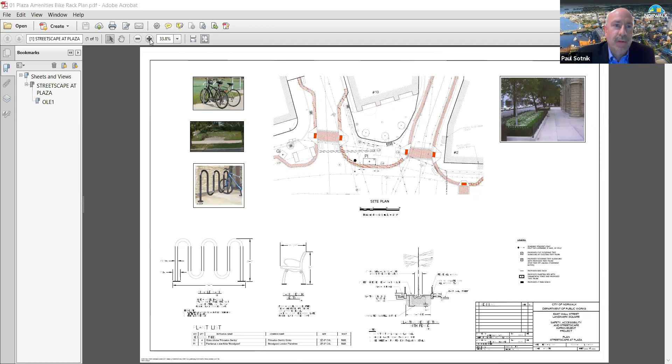For a minute right now I'm going to blow up the middle of the map so you can see some of the information of what we're talking about, and a little later I'll expand it even more. This area is the plaza in front of the restaurant Aji at number 10 Wall Street. What I wanted to talk about is where the bike rack is being placed and some of the other amenities related to all of the underground utilities in this area.

Just to recap, after our public information meeting it was determined there were 5 key stakeholders with interests related to the design of the plaza area and the selection of the bike rack: the pedestrians, consisting of residents and patrons of businesses and restaurants in the Wall Street area; the Wall Street Neighborhood and Business Association; the Norwalk Parking Authority, by way of providing easy parking access to those businesses and restaurants; the Tree Advisory Committee; and last but not least, the Bike Walk Commission.

What I can do is recap a little about what we tried to do related to those stakeholders, and work toward how we came up with the bike rack, the design of it, and the location of it. For the pedestrians and residents, we provided wider sidewalks in the plaza area, basically 20 feet deep on average by about 50 feet across. The property line right now for number 10 Wall Street is that dark line going around — this is private property, anything in this area is city right of way. So we were able to provide the plaza area in the current roadbed with a bench right in this area.

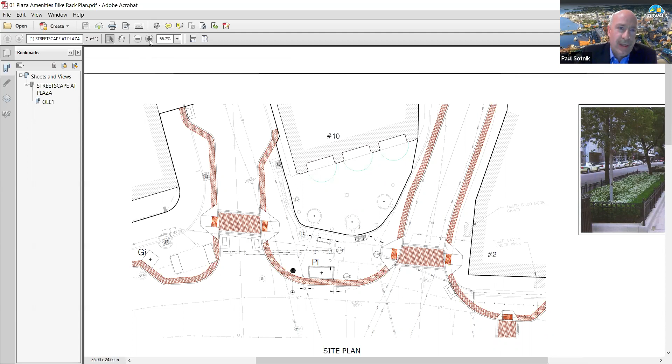And I'm going to blow it up a little more for you. Can everybody see it, or is it better if I keep blowing it up?

That's good for me, that's okay. Yeah, that's good, Paul. Okay.

Bench area, bike rack, historic street light, and a planter bed is what we're looking at.

The Wall Street Neighborhood Association and Business Group wanted to have an area where there would be planting beds. There are currently 5 trees in the area with tree pits that they've wanted to do plantings in for many years, but other issues led to them not doing that. So they wanted an area where they could do that, and historic street lights with outlets that could be utilized for holiday lighting. Those are the 2 items they've really requested.

Norwalk Parking Authority: we've increased the number of on-street parking spaces in conjunction with the Parking Authority to allow greater access to the businesses and restaurants on Wall Street. Previously in the overall project there were 12 spaces; the proposed plan provides 13, a net increase of 1.

Tree Advisory Committee: we've provided additional trees within the overall project. We previously had 5 within the project area, and we were able to increase that to 9, a net increase of 4.

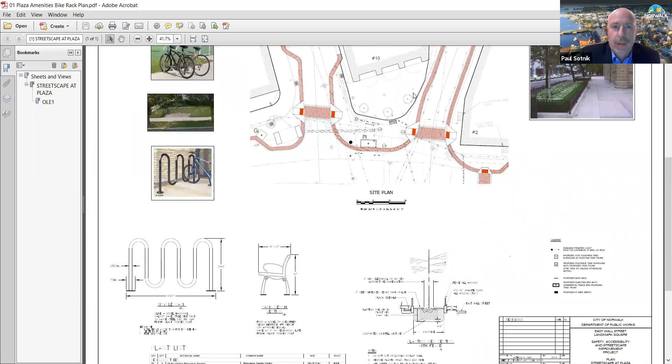It'll be powder coated black to match the existing streetlights, the bench, and the bike rack that I'm going to talk about. I'll zoom out for a second to give you an idea of what this planter will look like, and pull down to show you that, then let me focus in on it a little bit.

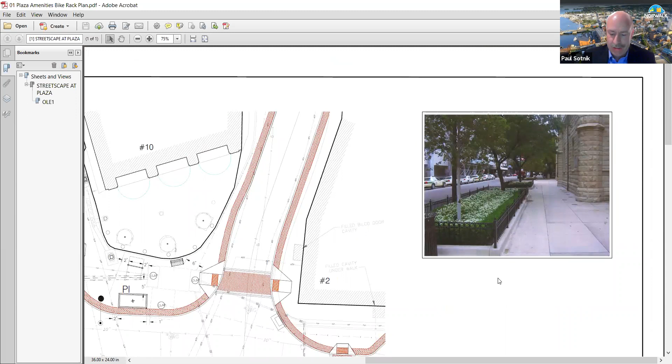This is an area with a planter, and I'll blow it up a bit more so it's easier to see. This would be a similar style planter, with a granite curb in this area, and the fence would be a similar style as what we've spec'd out. This basically makes an accent for the plaza area to give it a little more impact, and allows people in the neighborhood association to do the plantings as they've requested.

I'll get back over to this area, and blow that up in just a second if I need to. We want the plaza area to basically be a focal point for the project.

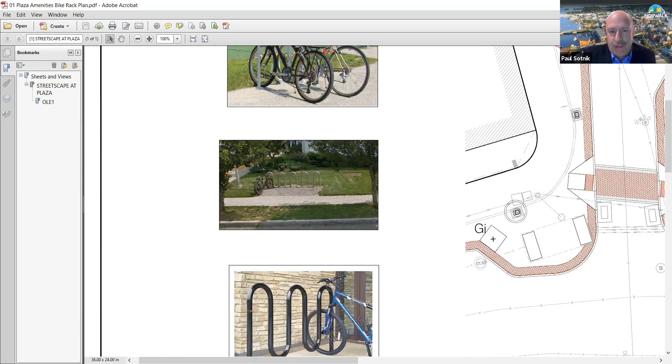Now we get to the Bike Walk Commission, which is what you guys are really interested in. We've provided a wave 5-loop bike rack, similar to what is in these pictures. This is up against the wall, similar to what Aji has as a fence around their property at the property line, so it would go in similar to this. This is the Bethel Public Library, and this is another piece of information from one of the manufacturers that makes the wave bike racks when they're loaded.

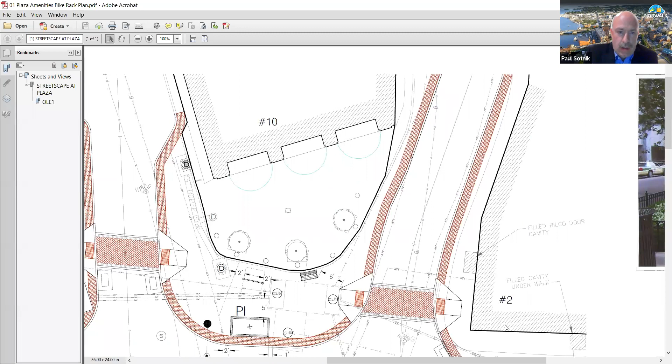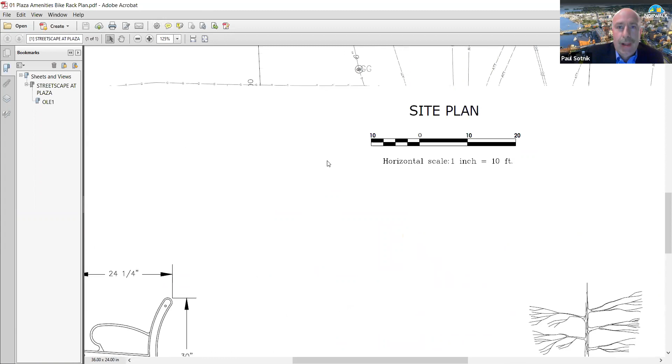That was selected as a result of the underground utilities in the area. I'm going to blow this up one more time to make it easier to see, and start pointing out the underground utilities that are there, because this area of town is so old it's what I would term as utility spaghetti.

You've got an Eversource Vault. As we go through, I'll give you an idea of each one so you can get a look at what appears to be a pile of real estate from an aerial view. As you get underground, that's not the case. There are a lot of utility structures underground that render the amount of space to work with far less than what it appears from above ground.

As far as Eversource, there's a 19-foot by 8-foot vault here. There's an 8 by 10 vault off of that one. There's a duct bank that goes to a utility vault across on the corner of Wall and High Street.

You've got the duct bank there. Then as you start to come out with the other utilities, you've got conduits that run from that vault across to the street lights on High Street, and also in this area out to the street lights on the corner of Knight and Wall Street.

And the conduits from the existing street lights are going to be replaced, so that's not the biggest issue. But in addition, you've got an Eversource 6-inch gas line that runs up High Street through the plaza area.

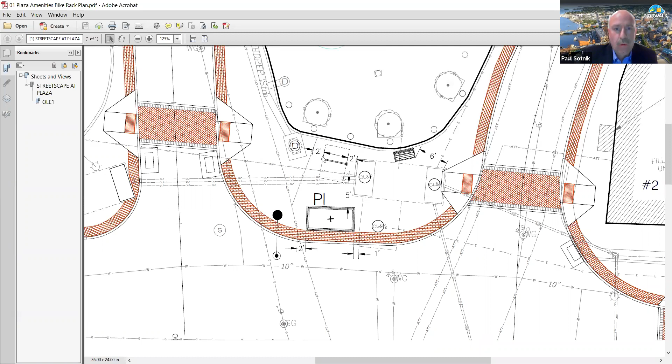You've got the drainage in this area for catch basins that are going to be converted to a manhole. And in addition, you've also got a 6-inch water line from the first taxing district that runs up in this area. You've also got an electric line from the vault that runs up Knight Street.

So as you see the picture here, there's not a lot of room, because the utility companies and Eversource will not allow you to put fixed objects over the top of their vaults or duct banks so that they can get into them. So basically, you've got this space in here, this little space in here, and then the space for the planter and the pedestrian area.

So in coming up with a plan, basically to try and maintain a minimum, I wanted at least 5 feet. We were able to get 6 feet for the bench. That's a 4-foot long bench similar to the style at City Hall, and I can show you a picture of that after if you want to see it. Then this planter, as we talked about, we showed you that already. You've got the historic street light.

So to keep this area open for pedestrians as you come down Knight Street, if you had the bench in there, go across the ADA ramp with the 6 feet. Now I'm going to show you a little more of a blow up on the bike rack so you guys can see what I did there.

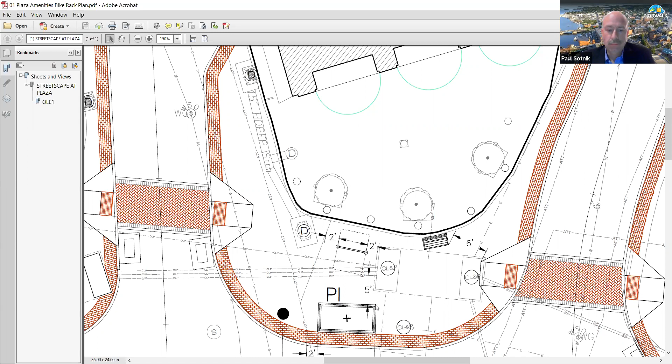I've got a couple of questions if I might go first. So first of all, Paul, thank you very much for all the work that you put into this. And in particular, I want to acknowledge all the constraints that you worked around here with the utilities, it being a very old part of town. I love to see the addition of pedestrian space, especially in a part of town like Wall Street. I think it's desperately needed.

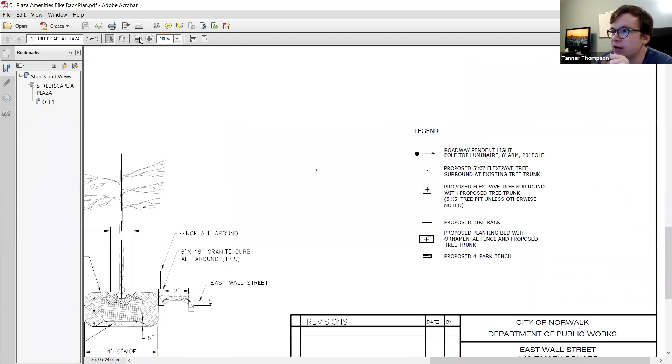With that said, I want to first check in and see if you were able to consider and weigh the pros and cons of a raised crosswalk. I know that we have a little bit of precedent for that in South Norwalk on Washington Street. One of the crosswalks is raised there, not all of them, but in my personal opinion, it really contributes to the atmosphere of pedestrians first. It really sends the signal that when the cars cross that crosswalk, they're a guest in that space.

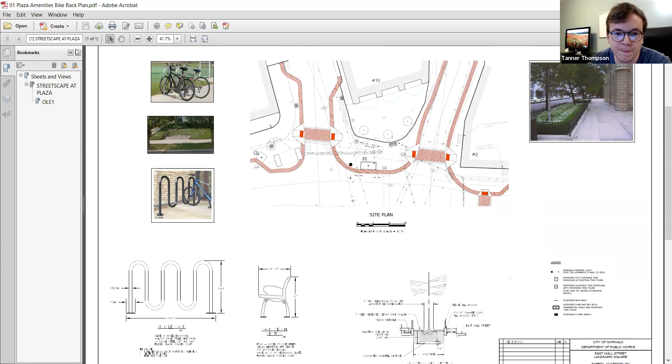I can answer that question for you. Yes, there is. I didn't present the entire project because I know Nancy was really interested in the bike rack and that's what was on the agenda, but this crosswalk right here is a raised crosswalk with RRFBs in both directions.

Okay, well, that answers the first question then. The other question, or rather, it was more of a comment.

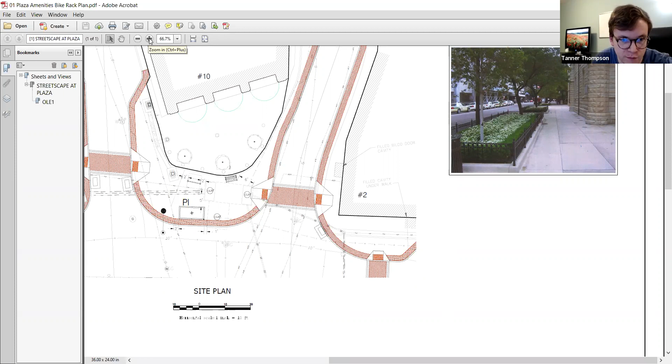As a member of the bike subcommittee and also as an avid cyclist, both for sport and for transportation, I appreciate the consideration you've given to fitting a lot of bicycles in this rack. However, even with the priority that I like to give to cyclists, I wonder if given the rest of the streetscape there on Wall Street, allocating that much space to bike storage is the right move, especially with the risk that a bike parked on the south side of the rack, the bottom with the map that you've drawn, would really get in the way of pedestrians flowing through that area.

And I wonder if it might be better to just push the rack up all the way against the property line of the Peruvian restaurant there. By the way, as an aside, that restaurant's fantastic. It's one of my favorites in Norwalk, and you should all try it, especially because they have outdoor seating.

But yeah, I think given that space is precious here, it might be better to give that space in the very middle of the plaza that could potentially be taken by a bicycle, to pedestrians, by pushing the rack back against the property line. But I'd love to hear other opinions there.

I could probably squeeze another foot out of it in this area. Like I said, I gave a foot to the fence and I gave 2 to 2.5 feet to the front end of the bike. In reality, it's probably not that long. I could move it up a little bit and pick up a little space. And I did this very conservatively. I made this rectangle here 7 feet. The bike in reality is not that long.

Because I talked with Judd about that and we were thinking maybe 6 feet max, unless somebody's parking a cargo bike, but if they are doing that, then that's a great problem to have. They won't use a rack anyway for that. This gets up to maybe 6.5, 7 feet then if we were to do that.

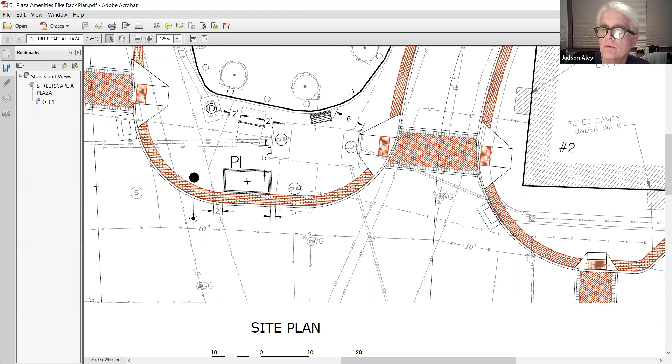Paul, can you show an image or two of the wave rack? You had some photos there.

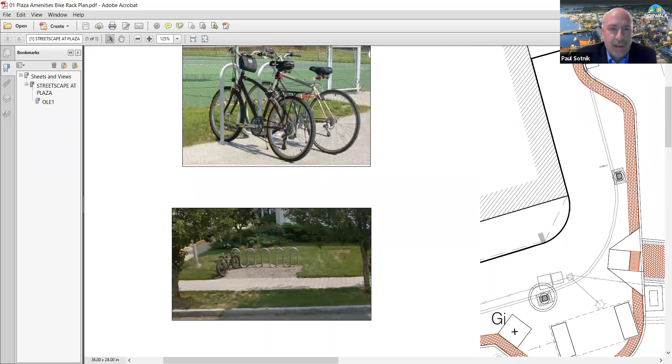This one's only got basically a 2-wave that you can use instead of the 5. This one is like a 7.

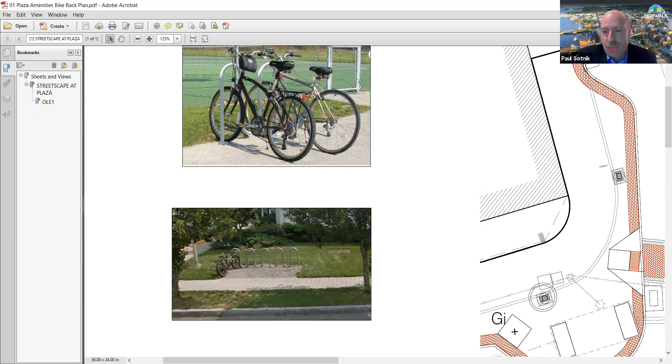This area here is downtown Bethel at the public library. Realistically, this is not the same situation, but I wanted to show you a municipal building where they were doing it, and there's a ton of space there. It's not quite like what we're doing. This is probably more along the lines of what we're looking to do, and you can see the tire is halfway up and they've got probably a foot of space. So we could move that toward the fence a little.

Yeah, I like that idea. I think it's a good point Tanner made. So if you can do that.

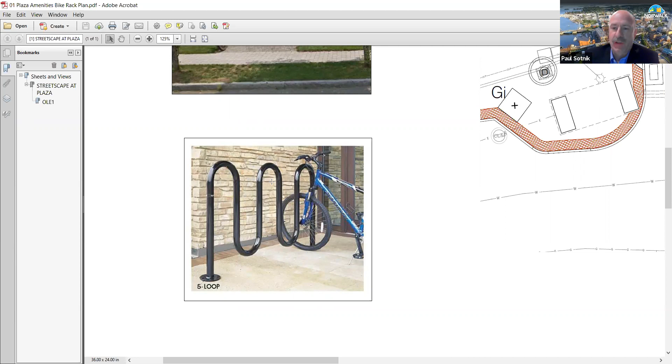When I lay this stuff out, I do it very conservatively, and any space we can get out in the field is gained space. What I'd probably do before they install the bike rack is have one of you bring a bike down there, put it in, measure the bike, and give it another 6 inches right in the field, then tell them this is where to install it. That way, if we can gain 1.5 to 2 feet, we'll gain everything we can for the pedestrians, because I want to give them as much space as possible. But when I was originally laying this out, I did it conservatively so I could see if I could get a minimum 5-foot sidewalk in there.

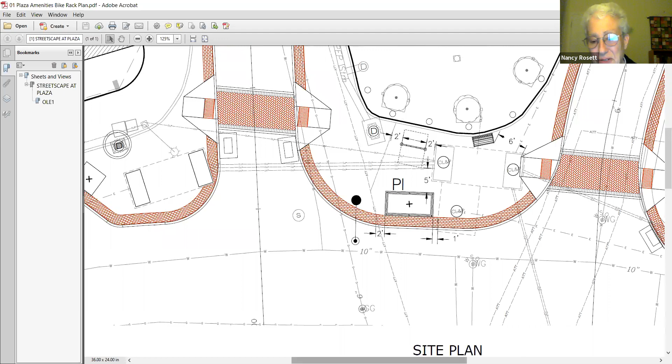Those of us who've been around Norwalk for a while know this project has been worked on for quite a long time. It originated with redevelopment, who came up with a gold-plated design, which Paul has managed to not only whittle down to a reasonable size, but also keep the essence of what redevelopment was trying to do in terms of making this area of Wall Street a pleasant place for people to be. So I think you've done a nice job, Paul, and I personally thank you.

You're welcome. Anybody else?

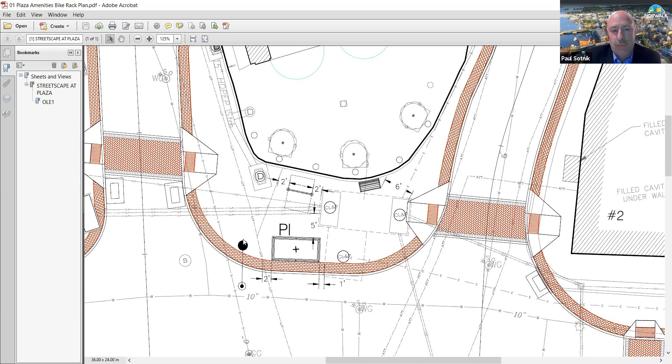Even the fence manufacturer told me a couple of things we can do as little add-ons. We won't get LOTCIP to pay for it, it'd have to come out of the city budget, but there'd be some unique things we could do with the fence we were talking about. They said if we wanted to, and we already do this with our historic streetlights with a city logo on the base of the pole, we could get them made and put the city seal on all four sides of the fence in one of those circles. A little thing to make this a unique area for Wall Street, something different than any other section of town has.

Hang on a minute, Judd, I think Christine wanted to say something. Okay, thanks Nancy. Hi, thanks Paul, and thanks so much for your work. Good work, I miss seeing you. It's just great to have you here tonight.

Thank you. I just had, this may be a really stupid question, but is there a way, like an awning over those buildings, that could be a covered area? Is there any potential to put an awning? Is it close enough to the building or no?

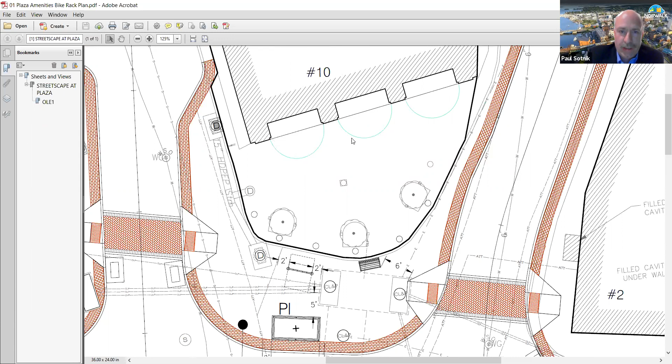No, because this is the actual face of the building, and these, believe it or not, are the awnings on the building right here. Oh, I see. Okay, I was wondering about these trees. Those are private trees. All of that stuff is private, and that's why we couldn't really do anything about it.

Actually, one of the things you'd see even now, if you go out there today, is the ADA ramps are right here in these areas, and they're actually putting city pedestrian traffic onto private property, which this will alleviate. It'll get it out into the right of way, which is where it should be, not on private property. But Judd, it'll still give them access so they can go in here and access the restaurant like they do today.

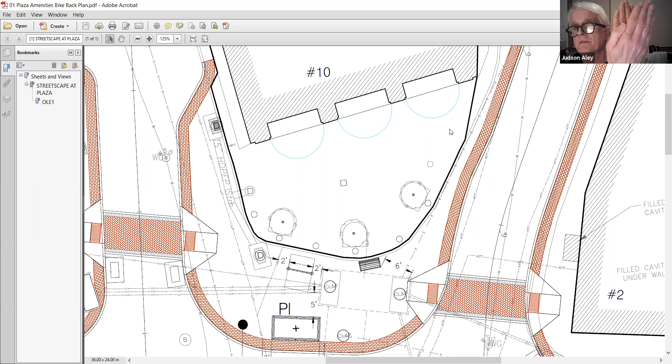Paul, over at the intersection of Main and Wall, last year you upgraded the light, the signals, the ADA ramps and the indicators. And there's that historic clock, which is now sort of located behind the crosswalk signal. I know you're far into this plan - is there any chance that clock could get moved over into this central location?

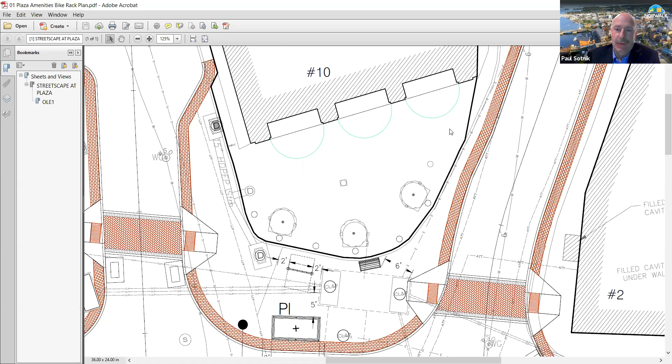I'd have to see about that. I don't know. Right now these plans have already been submitted to WestCog and DOT, so they're probably not going to let us add things to the budget if it increases the budget of the project.

Yeah, I know Rec and Parks has a plan to upgrade the park there. So I think the clock there will make a little more sense when they upgrade Freese Park, and they're planning on adding some benches and hopefully one of our bike racks.

So hopefully it'll be a familiar little... you're familiar with the clock, Nancy? Pardon? You're familiar with the clock? Yes. Yeah.

Okay, and basically this style - like I said, if you look at the aerial view, it looks like there's a ton of space to work with. Well, now you see underground, there's really not a lot at all.

All right, well thank you Paul. We appreciate all the work you've done, and it's nice to see you again. Hey, you're welcome. Nice to see you guys.

So this is what's been submitted to the state. Do you guys have any other ideas that you want for bike racks, or that would work in this location? I think it's plenty. Yeah.

Just as an alternative, I would propose, if possible, taking the existing rack and making it longer, or wider, and then pushing it back against the property line. Perhaps that would keep the same capacity for bike parking, but have it feel more out of the way to pedestrians. When this is not loaded, we might be able to pick up another 1.5 feet. So when it's loaded, this might end up being maybe 6.5 or 7 feet, but when it's not loaded, it's going to be over 10 feet. So it'll be a spacious area.

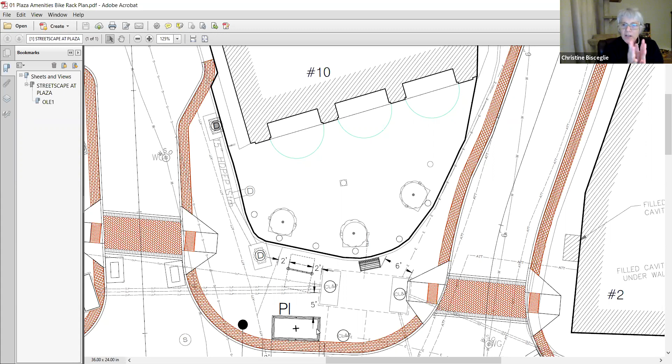Oh, sorry Lance, I have one quick question, and I think this is to everybody - the e-bikes are becoming very popular. I don't know, I've seen these racks, I've used them, but do the e-bikes fit in those wave racks, those loopy racks? Okay, thank you. It's probably a good question for Sam.

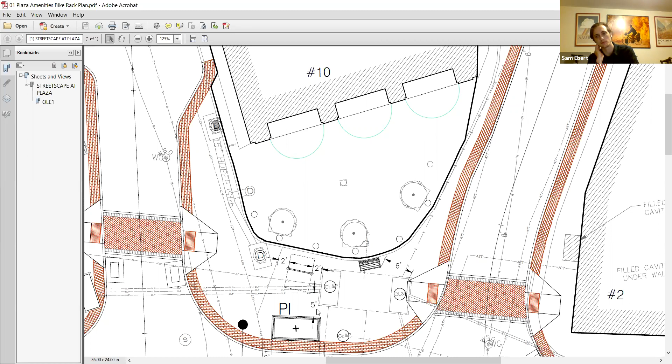Yeah, they occupy pretty much the same footprint as a traditional bicycle in most cases. Christine, what you've probably seen is some of the fat tire e-bikes, and they should still work with a hoop style rack. If you want to see one, there's the rack outside the Belden Avenue Library.

And what I'm going to do too during this project - you'll notice this catch basin here that's in the road now, we're changing this to a manhole. I really have to be careful about if I can remove this pipe, because this drain is already connected to it. As we do construction, if I find there's nothing else connected to it - that's what I'm afraid of, is somebody may have done something over time that we don't know about in the pipe.

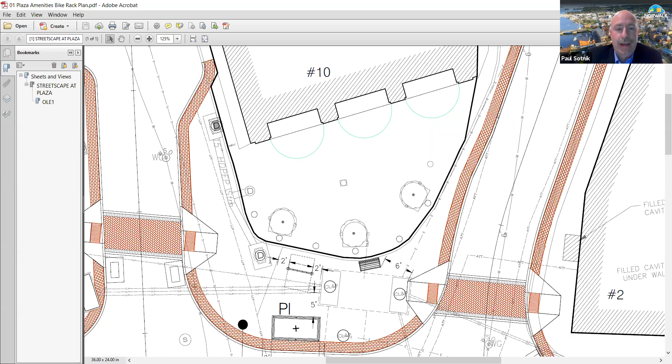If this is not connected at all, what we'll do is maybe we can remove this, and then I could put another bench in. But the reason I didn't put the bench here is I didn't think people would appreciate sitting right over the top of the manhole. So that's why, if anybody asks you, there's no bench on that side. It does take a little space away from this side, and the ADA ramp - you could squeeze it in, you'd have about 6 feet or so, but I've got to know I can take this manhole out, and I don't know that yet until construction.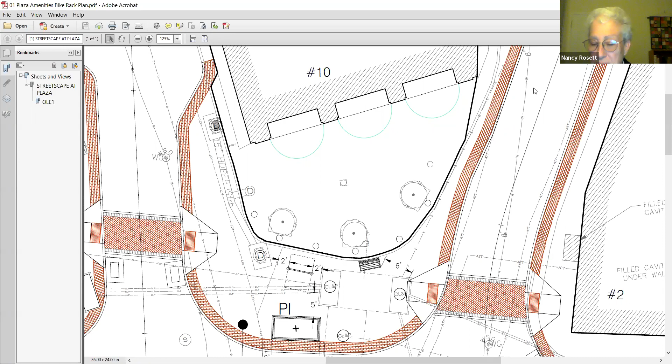Now that the snow is receding, we can see if there actually are sidewalks at the foot of Cliffview. Do you have an update on the Cliffview crosswalk? The Cliffview at Silver Mine.

Yeah, as we talked, that's a four-way stop sign now, so it shouldn't be a big problem to put a crosswalk on all four legs of that intersection. And we'll have the ADA ramps, so we'll just have to work on scheduling that. We'll probably try to tie it into an existing contractor or an upcoming bid.

Jim and Garrett, the issue here is that Cliffview was repaved and a crosswalk was added without the ADA ramping on either end, and that was kind of a problem. I think Mike has found a great solution, so thank you very much, Mike.